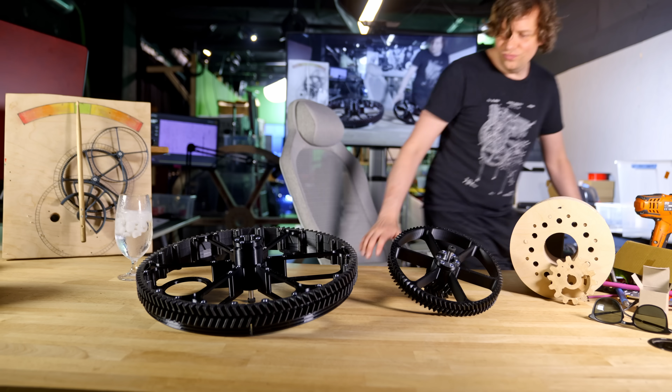All right, yesterday we made this assembly and today we're going to make the third and last gear of the music tightness meter. The middle gear here is this one, the large one here is the one down here, and today I'm going to make this small gear that spins the fastest and shows me very clearly if the machine is getting too much or too little power input.

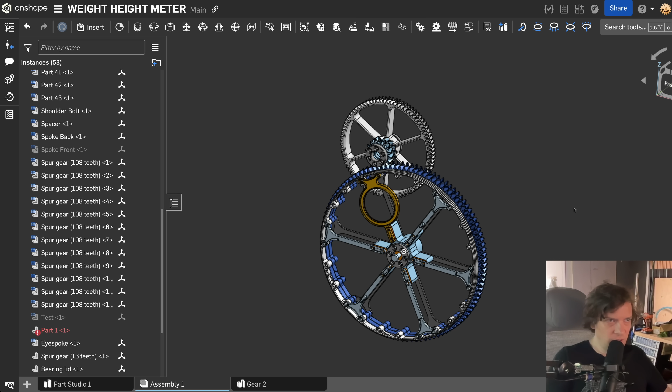At the bottom here you see I have Part Studio 1 and then Assembly and Gear 2. So I have 2 Part Studios and now I want another one. And we're starting that from the Assembly, Create Part Studio in Context. And I'm choosing the origin and that's it. So we're gonna derive. First I wanna choose from Part Studio 1 and I wanna choose Side Sketch. So now we have a derived sketch in this Part Studio, which gives us the beginning for our third gear right here.

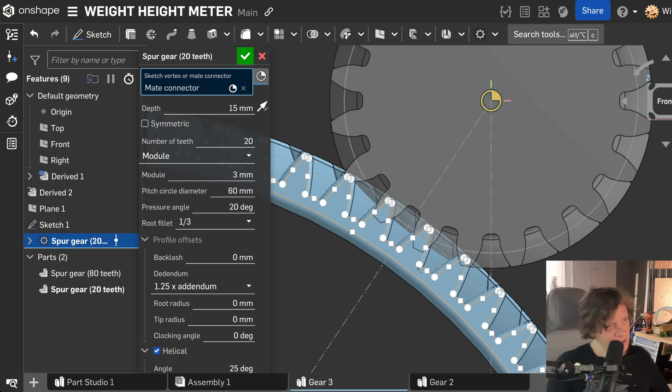And here's a really nice feature, the clocking angle. So you can see here now that the gears are not meshing. Then I can just add a clocking angle. So let's do 2 degrees, 6 degrees, 8.5. And the teeth are meshing beautifully.

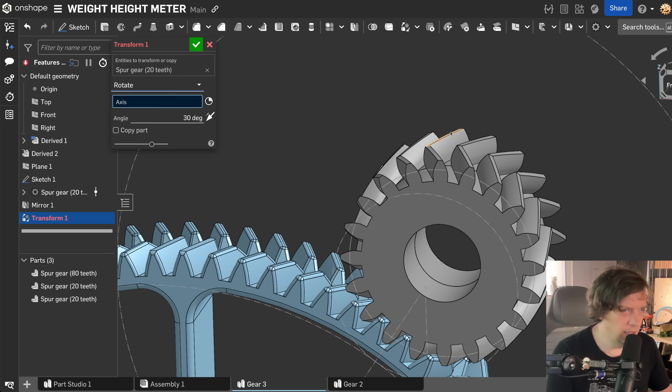Let's mirror this gear. New part because we want to transform, rotate, and as always this is my favorite math trick. I feel like a genius. How do we know how we can rotate this? By half a tooth. We do this 360 degrees divided on 20 teeth, which means that's the degrees of one tooth, and then we split that in half, divided by 2. So here you can clearly see how evenly spaced they are.

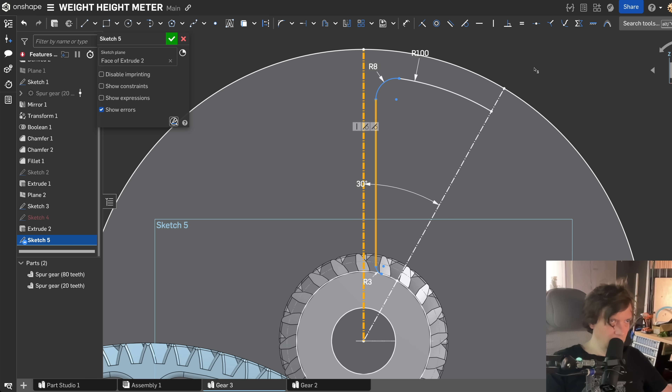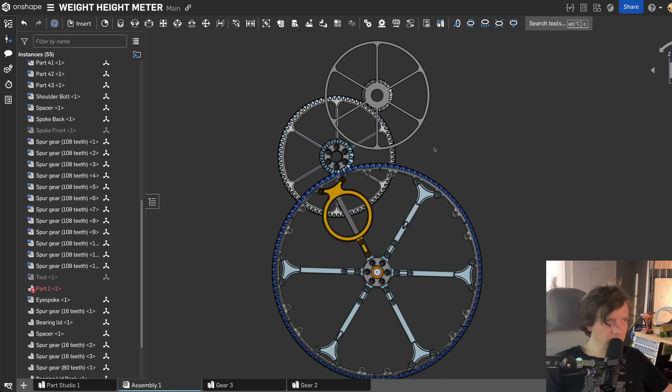I want this wheel to be really spindly and elegant. So we're gonna go crazy, like 4mm wide spokes or something. Let's extrude this little beauty. Let's go ahead and put this into the assembly just to check what's happening here. Insert, gear 3, boom. I like the look of that. I do think that the second gear should be notably larger than the last wheel. So I'm thinking the top wheel here should be like a bit smaller.

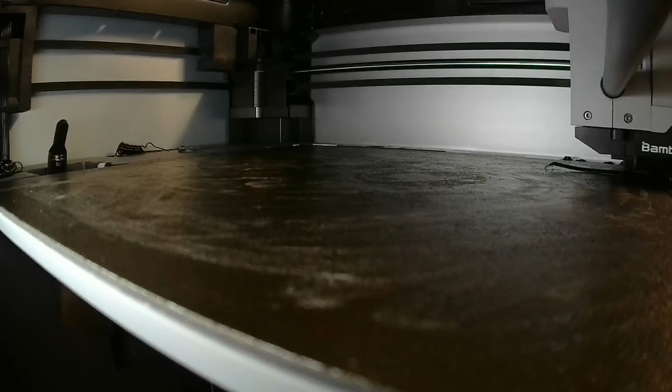I do need to make some more parts, but better to get the printer going so we can design while the printer is going. Autoplace. Oh, it's not a long print. That's good. That means we will be able to finish today. So with this kind of layers in the beginning, I'm definitely going to use glue with this PC filament. No support, no overhang, easy peasy to print. So here's the third wheel. Feels really nice actually. The wheels are soon done.

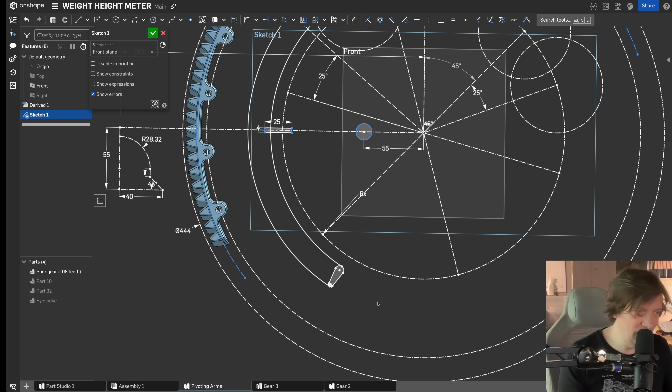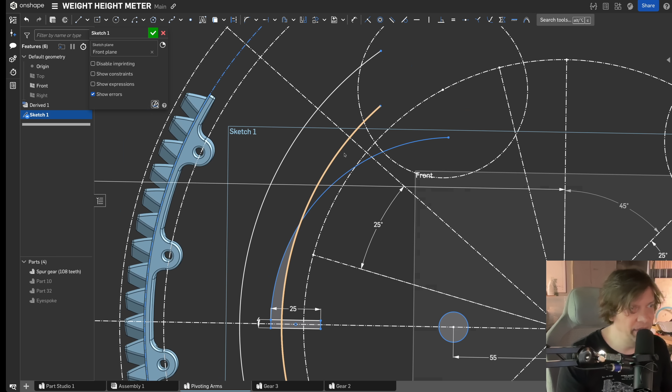I'll try to explain what's happening here. This thing is traveling on these arcs and interacting with this. But this thing is pivoting around this pivot. So if we draw a center point arc on the outside, you can see that eventually this pin will become lost. And in this configuration, the pin is getting lost at this angle, but we want that line to intersect here. So I can do that by just pulling this out until there. But this thing has to let through the wheel when the wheel is going the other way. So I have to make some kind of function for that.

It's Saturday evening. I'm going out for dinner with my girlfriend. I'll be back tomorrow to finish this vlog Sunday.

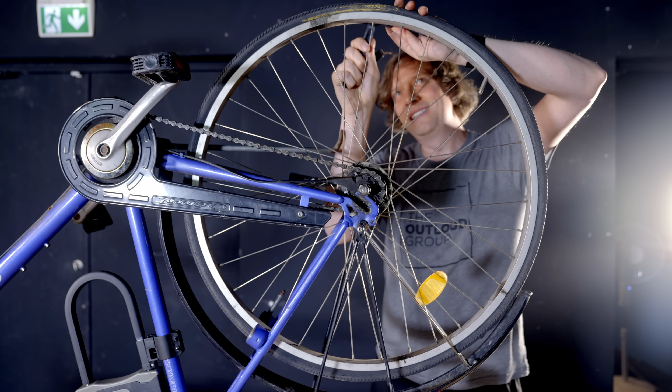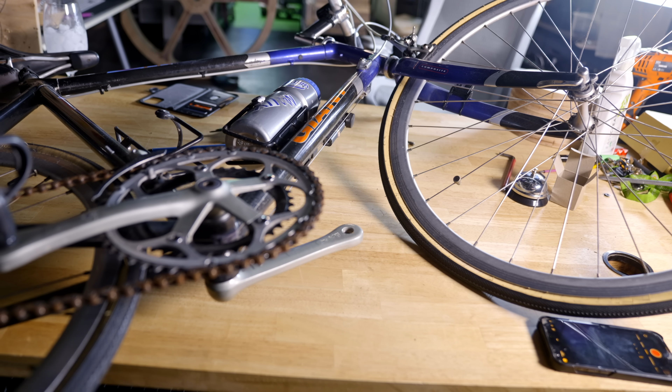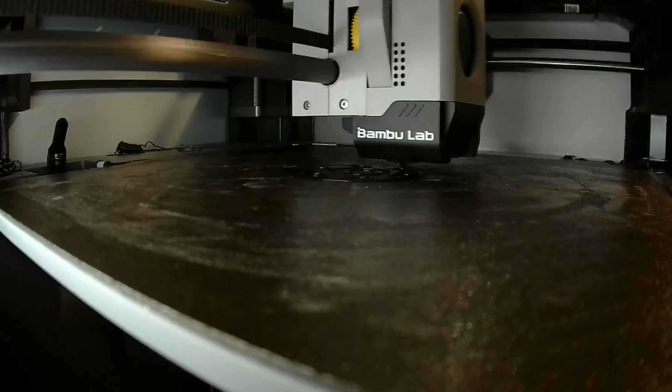Okay, should have the last parts printed. All right. Sleeve and the bearing seat. Have to... We have all the parts for this assembly ready to go. So let's start with pushing the bearing into the gear here and the bearing into the bearing seat here. So then the bearing seating here with this part that has the ridge here that is pushing on exactly the outer sleeve of the bearing.

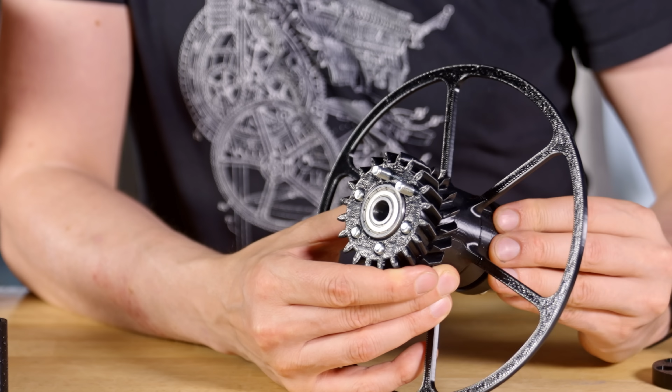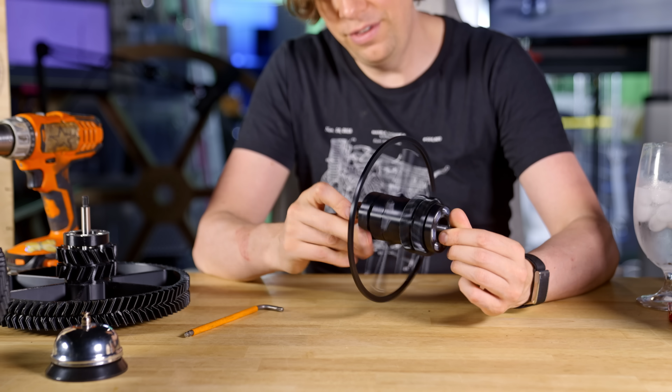If I take a close look at the gear, it runs perfectly true. The shoulder bolts and the pressed bearings. Let's add the nuts. And our third little assembly is done. So the full gear train. That looks cool. Okay, so that's all 3 axles on this module.

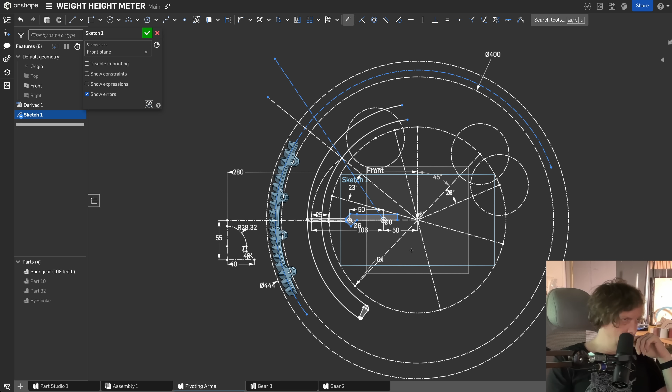So I need a frame to hold these gears together, but before I start to design the frame, I want to design all the moving parts of the assembly. So we have this hammer, and we have also another cool thing here. And I want to design them first so I know where the pivot should be in the frame. I used this sketch to figure out where the pivot should be.

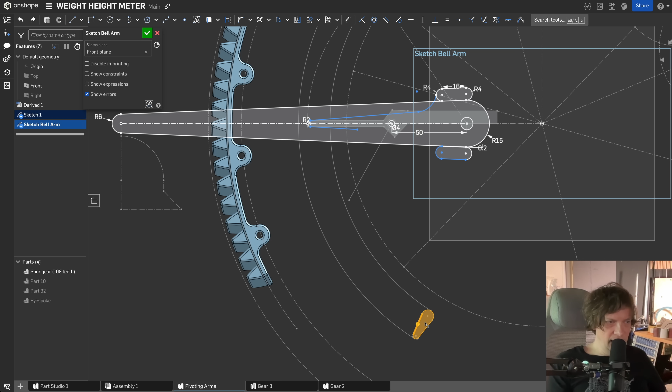And now I'm gonna do a new sketch to have it a little bit cleaner that I'm gonna rename to, say, bell arm. Let's just make a very simple arm like this. Constrain it to our 2 pivots, and now we have to set the size. 6 perhaps. That looks cool. The yellow thing down here will come up like this and lift this thing. But we have to make sure when it goes back through the thing that it doesn't break. So I'm doing a safety thing here.

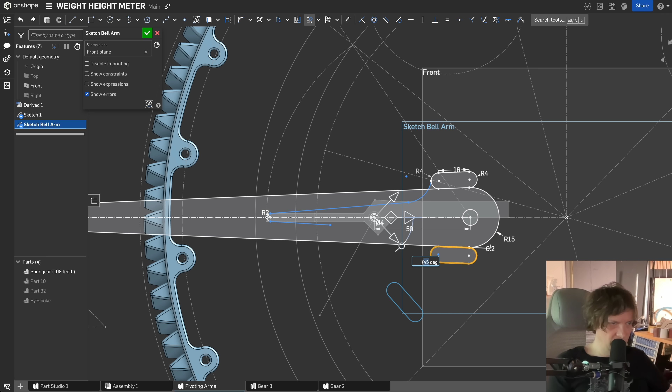And I just discovered that if I want to pivot some sketch lines, I can just take this and move it. Boom. And I can pivot it my 45 degrees that I want to pivot it. Very, very cool. I don't think you can do that in Fusion 360 without doing a circular pattern. Okay, I'm done with the sketch, and here's the part.

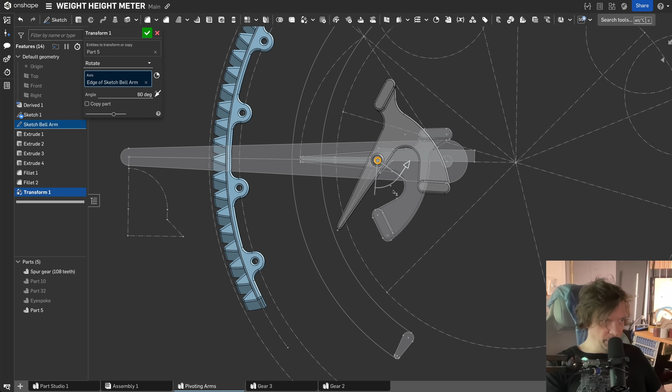So this is the part's normal position, and it's gonna get there because it's just weighing more on the right side. So I don't need to use a spring. And then it can pivot like this, and then it clears the path of this peg without flipping over. And as soon as the peg is gone, it's gonna pivot back like this. Meaning, when the peg lifts this thing up, it's gonna lift the whole thing. And when the thing has fallen and the peg is passing through it the other direction, it's just going to open the door for it like this.

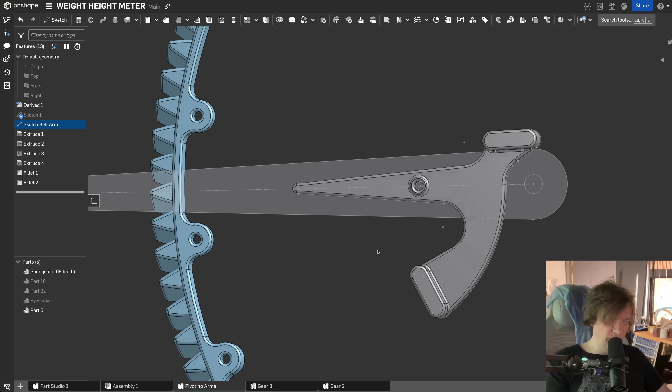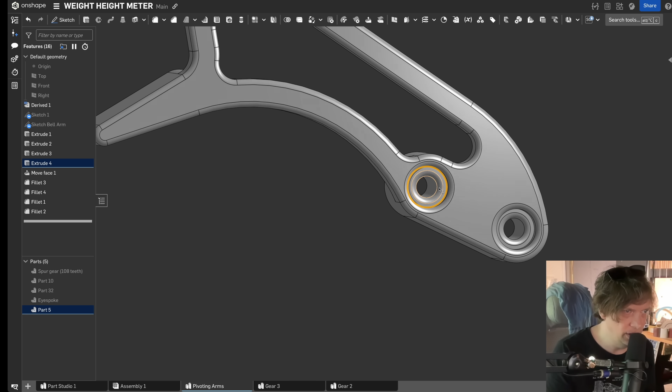I'm out of my PC filament. I'm going to try to print this in PLA CF, so carbon fiber reinforced PLA. This part would do fine in normal PLA. I'm just experimenting with these filaments to learn what properties they can offer and get familiarized with them. I almost changed my mind entirely for the design of this. I wanted it to be on the other side of the pivot arm, and now I'm ready to print this. These 2 screws are just for counterweight because I want this to fall clockwise. And this is the pivot.

Let's print this. Here's the first PLA CF part. What do we think? Comes off nicely. Support stays on the build plate. Ooh, this feels... Oh. Yeah, they said the layer lines were almost invisible. All right, we have a first PLA CF part.

I'm gonna use gloves. With carbon fiber filaments, everyone agrees that if you're sanding it, you have to use a respirator and gloves and should be really careful. And it can be good to wet sand it to keep dust low. And if you're drilling it and working it, then you should be cautious. But I'm very impressed with this part actually, because it looks beautiful like PLA, but it's really, really stiff. But I think it's safe to say that if your print doesn't require carbon fiber reinforcement, you shouldn't use it. But I definitely think there's a place for this material.

Oh, that's nice. One of the more beautiful filaments I've ever seen in black, actually. These surfaces are really, really nice. I'm gonna push these bolts all the way down. I added these bolts just as weights because I want this to pivot like this. Okay, so we successfully finished the third sub-assembly. It looks like it's meshing really nicely. We have our big third gear and we made our first PLA carbon fiber print ever.

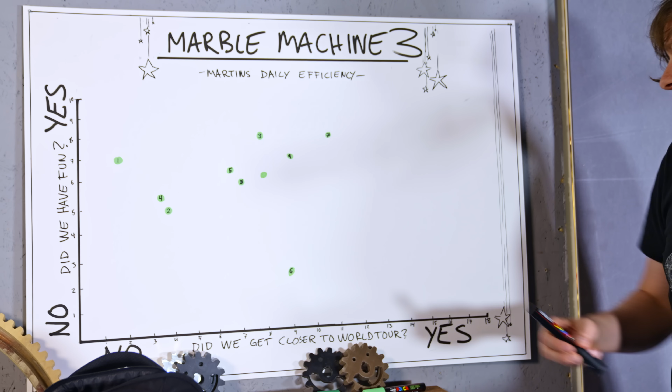This day is in the middle of the road, 8 and 6. We're right in the middle of this cluster that has started to appear. The weight height meter can't go above 9 because it's not the most important thing that I should be doing right now. But it's a relaxing thing that I put in during the move. It smells of tinkering, I have to be honest, and I'm longing to do projects that end up over here. When I get dots here by the stars, I'm gonna be so proud. Let's add 10, vlog 10.